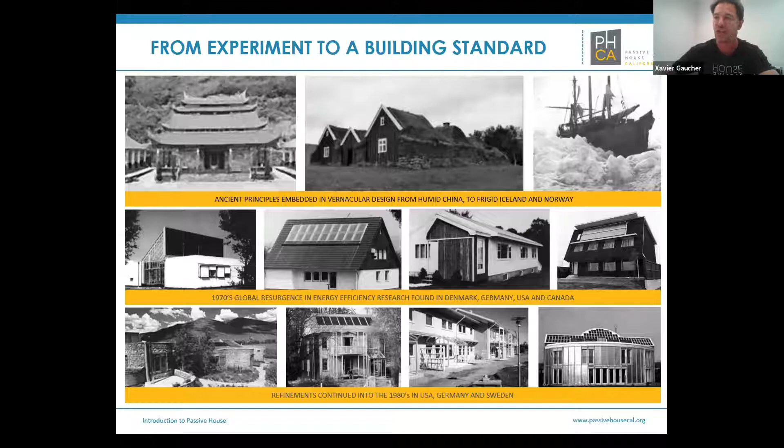And so in the late 80s, some scientists started looking at all those studies and experiments, and found that adding insulation or putting more windows towards south did not necessarily mean more comfort or less energy consumption. So they started to look at what was making buildings comfortable and energy efficient. And so in 1990, that is the first passive house which was built following those building science calculations and work.

Since then, the Passive House standard is the leading international low energy building standard, with almost 100,000 buildings all around the world. The Passive House Institute, based in Germany, is the one who started and is promoting the concept. And what's important to know is that the Passive House standard is not only for single-family houses. You have here an example of the Cornell Tech Tower in New York, a 26-story building certified in 2017. If you go to New York, when we're able to travel again, I encourage you to take a tour. It's a great building. And you have a 45-story building which just got permitted in Vancouver like a month ago. So don't only think small, think big.

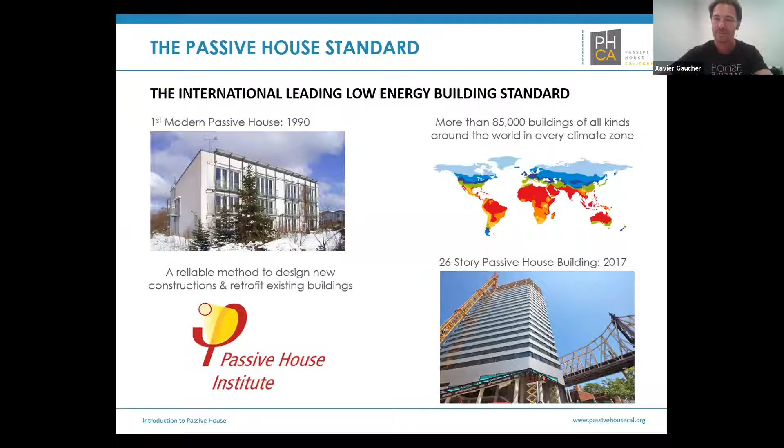One of the first results of that science research, done by Dr. Feist and Dr. Bo, the two scientists who initiated the Passive House standard, is that energy efficient buildings mean comfortable buildings. And it's as simple as a coffee cup. Either you go to Starbucks and they deliver it with an already built-in retrofit, a sleeve so you don't burn yourself, or you can use a coffee thermos and keep your coffee hot for a long time and not burn yourself.

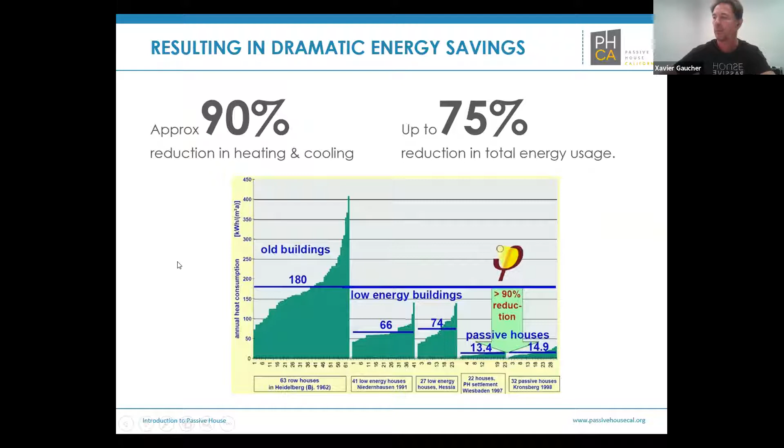Starting with the end, the Passive House standard reduces heating and cooling consumption by up to 90%, and total building energy consumption by up to 75%. This gives you some examples. The passive house standard has been around for 30 years now. In 2000, the European Community financed a study looking at 250 dwelling units across Europe. That's what boosted the passive house standard: they saw that the calculated numbers matched the operating numbers, which is always a big challenge with building standards, whether what you design matches what really happens in the real world. In that study, there was less than a 5% difference between the operating numbers and the calculated numbers.

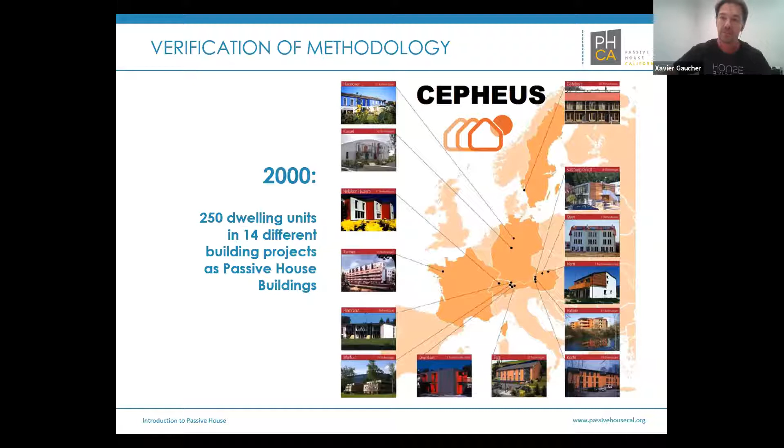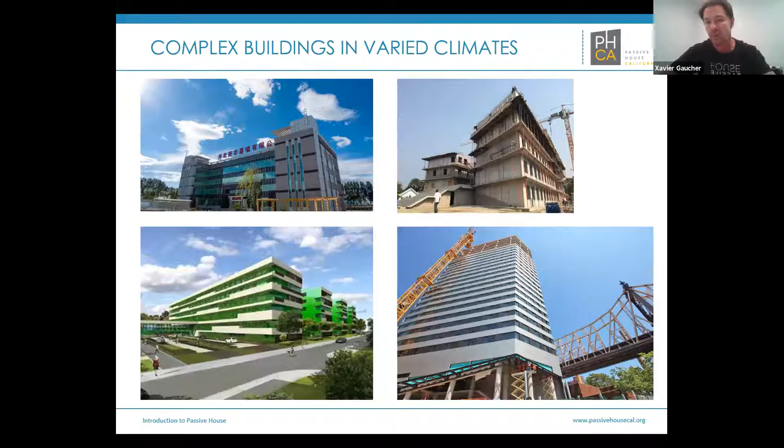And now the passive house standard is making it into a lot of building codes. And one of the reasons here is that when you look at New York's 80/50 CO2 emission reduction plan, reducing 80% of the CO2 emissions by 2050, you can see here that the building is a big part of them achieving their goal.

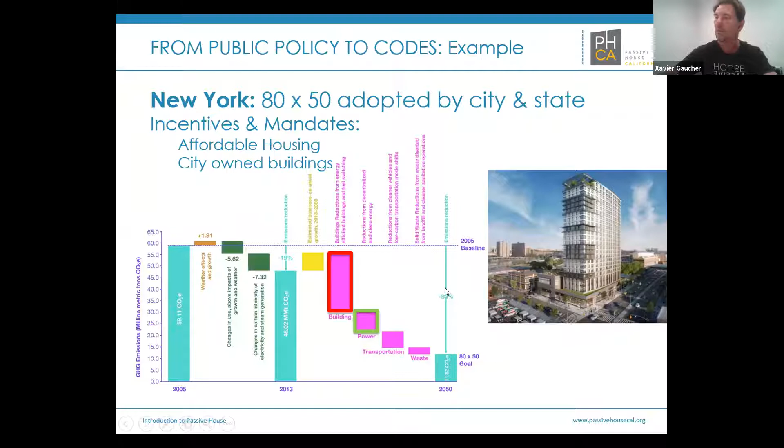Vancouver is actually doing the same thing, adopting the passive house standards as their construction standards in their climate change plan. Brussels was actually the first city in the world to adopt the passive house standards for all new construction, and Europe is moving all around in that direction as well.

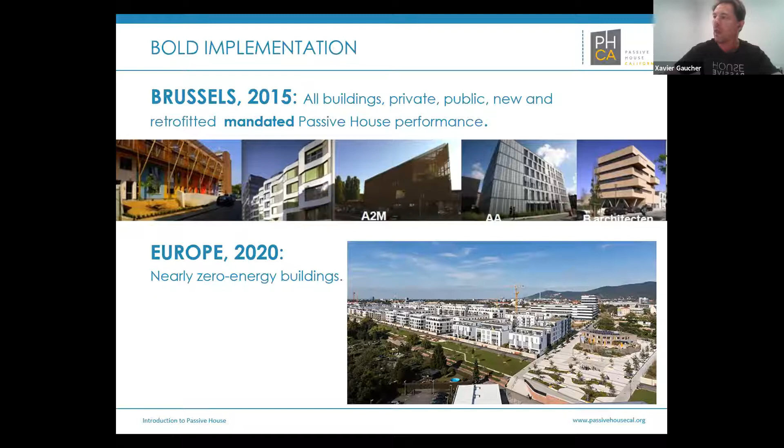And the only way to achieve that goal is to start from the beginning. The passive house standard is not a coat of green paint that you apply to an existing design. It's something that you take into consideration from the first line of the building that you design. Very briefly, it's based on focusing on the passive elements. So of course, the orientation, the massing, the thermal mass of the building, the insulation, air tightness, the windows, the doors. And it sets fixed performance goals. So those goals are fixed.

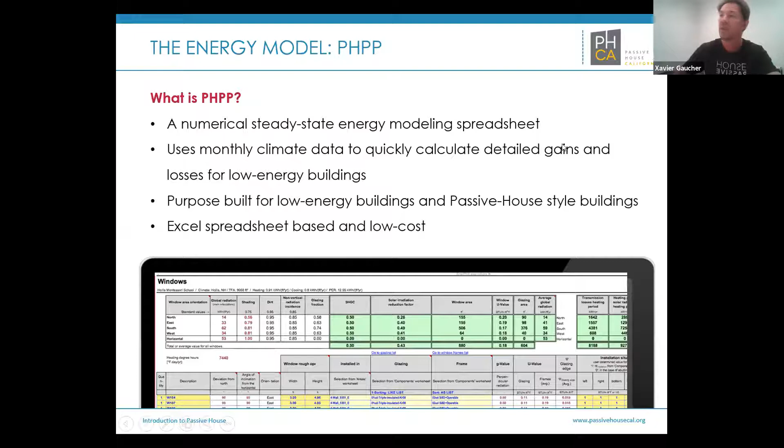The Passive House has 3 certification levels. The first one is Classic, and since 2015, you have 2 other certification levels. The first one is Plus, which is somewhat equivalent to Net Zero, except it's based on the building footprint and not necessarily on the building square feet. And you have the Premium one, which is somewhat equivalent to carbon neutral buildings.

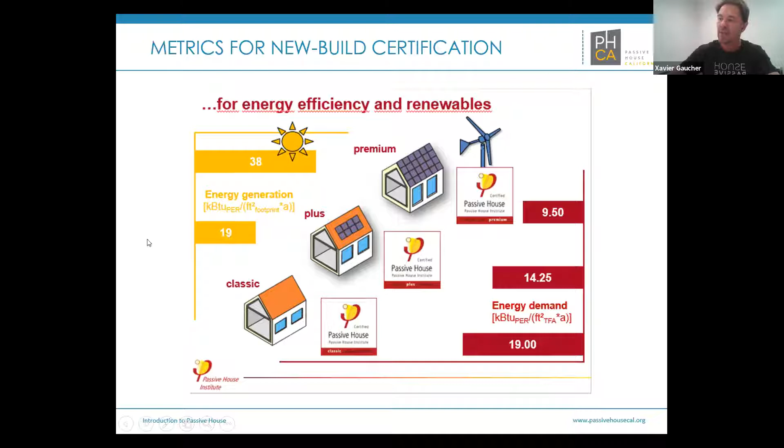And the reason that Passive House introduced those 2 is that we need to move towards renewable energy, but it's a huge challenge, as we can see now with everything happening in California with the power outages. If you look at the renewable energy we need and what's being used at the building level, a small portion, let's say 30% to be precise, is used directly for the renewable energy that you use.

But for 50% of it, you will need to go through storage, either short-term storage, which has about 80% efficiency, or long-term storage, which has a 30% efficiency. So basically, when you look at the quantity of energy that you need to supply energy all year round to a building, you basically need 2 to 3 times more energy. So that's one of the major issues, and that's why energy efficiency is a major part of the renewable energy transition.

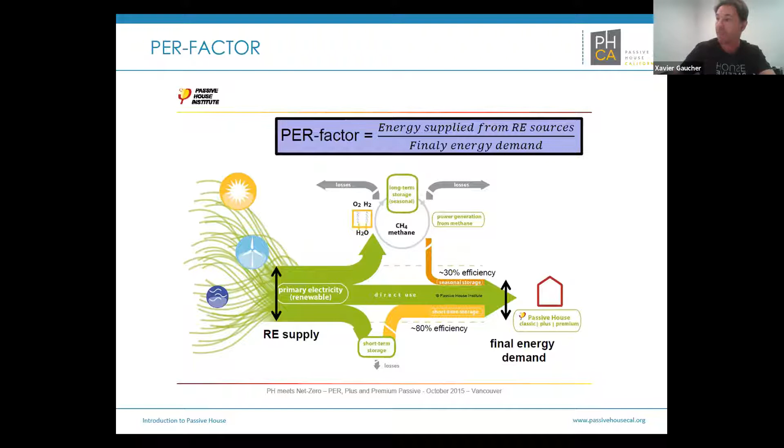As I said earlier, the Passive House standard is not only for new buildings. You have a methodology which is called EnerPHit for existing buildings, which is actually one of our major issues that we need to solve.

The Passive House is based on 5 principles. One is continuous insulation, and when I say continuous, I mean roof, walls, and floor. Two is avoiding thermal bridges, which are basically any holes in the insulation, which most building codes forget, and which can represent up to 20% of the heating and cooling loads. High efficiency windows and doors, and shading in California. Air tightness, and continuous ventilation. Those are the 5 Passive House key principles.

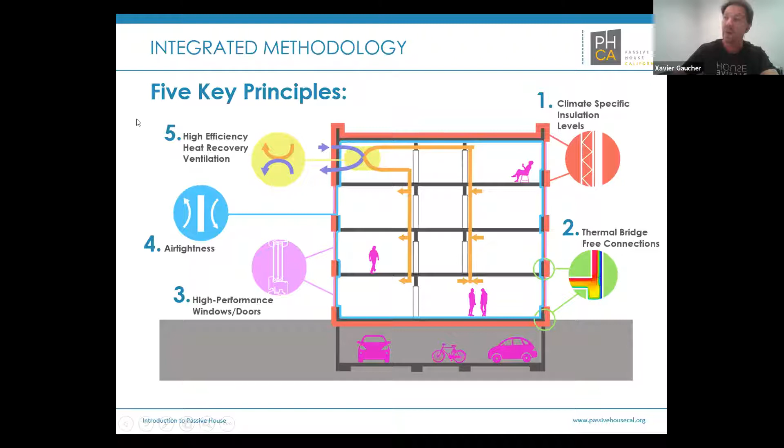Last, there is much more than that. First, what you need to understand is that the Passive House standard focuses on energy and comfort. That's the two aspects that the Passive House standard takes care of. Of course, there are so many other ones, embodied energy, water, energy type, and all that stuff.

And so LEED since January 2019 actually gives credit to Passive House standard projects. So by doing the PHPP modeling, you automatically get credit if you do Passive House buildings, because it's important that Passive House is not a certification or label like LEED can be, which takes care of much more stuff. Passive House is a tool, and Passive House is a tool which helps you to achieve better LEED buildings.

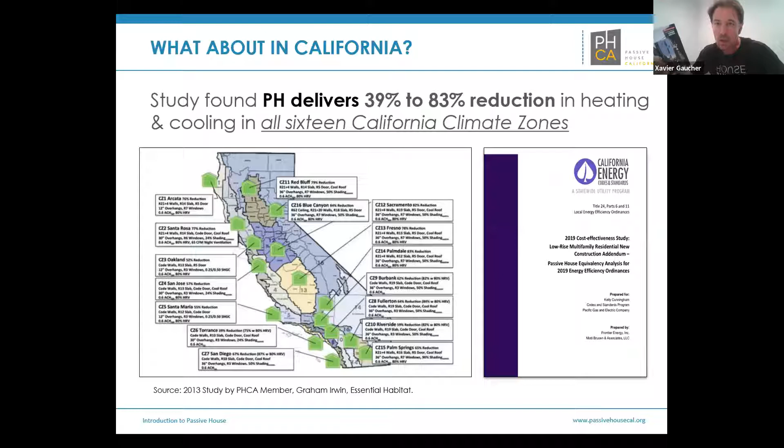Great, so I think we have time for one more question. Can you please discuss a little about how to go about renovating an existing home?

Christian, since you're on mute, I'm going to start. You can kick in after.

The EnerPHit process, which I was speaking about briefly during the presentation, is a step-by-step renovation. The goal is to look at the existing building and see how you can improve it, and to do the energy modeling of each one of the steps that you need to do, showing you what will be the final result. And you can tweak it and adjust it in order to see what it is.

The goal is to give you a roadmap for your renovation, and it may take 2, 5, 10 years. But when you do something, you know that you're doing the right things. Because today, when people change windows, they change to the windows that the best window sales guy is offering them. Is it the right window for the project? They don't know. So what's really important is to define that roadmap, and then to do the work according to that roadmap, which will guarantee you the final result.

And the nice aspect is it can be implemented over a long-term time period. So you don't need to do everything at once, because for a lot of homeowners that's a challenge. But if your roof needs to be replaced anyway, it's a good time to replace it with the end goal in mind. And then maybe over a period of 15 or 20 years, you reach the final goal of a high performance building.

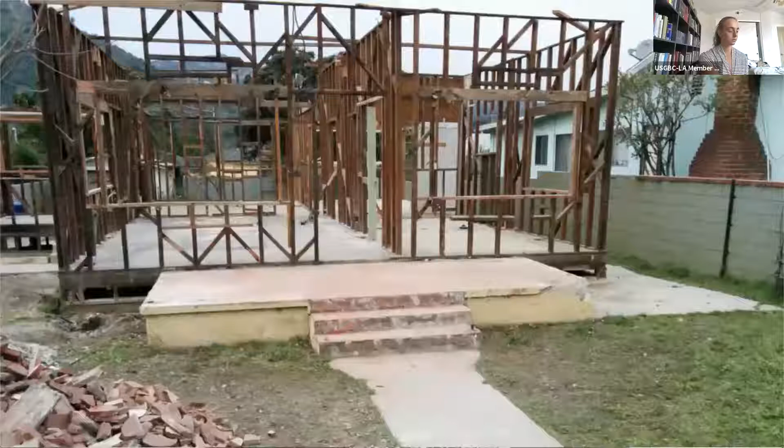So when we moved to Los Angeles in 2015, it was the only thing I had in mind. I wanted to build a passive house. And so we found this house, which, as you can tell, could benefit from some improvements. It was a 1,100 square foot, one-story house. To minimize the impact and budget, we decided to keep the existing footprint. So we kept the foundations and the outside walls and added one story.

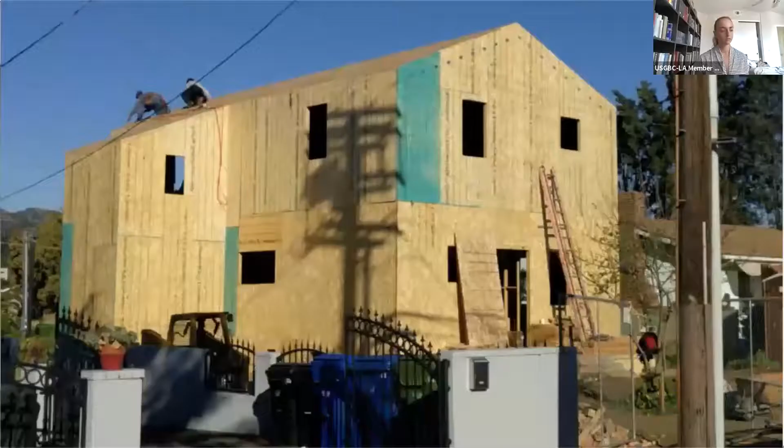So now downstairs we have an open living space with a kitchen, a dining room, a living room, an office/guest room, and a bathroom. Upstairs, we have a den, a laundry room, and 2 bedrooms with en-suite bathrooms, and it is 2,100 square feet.

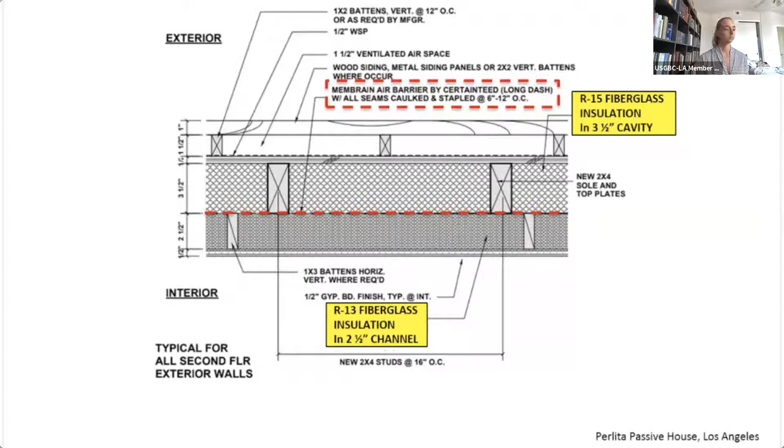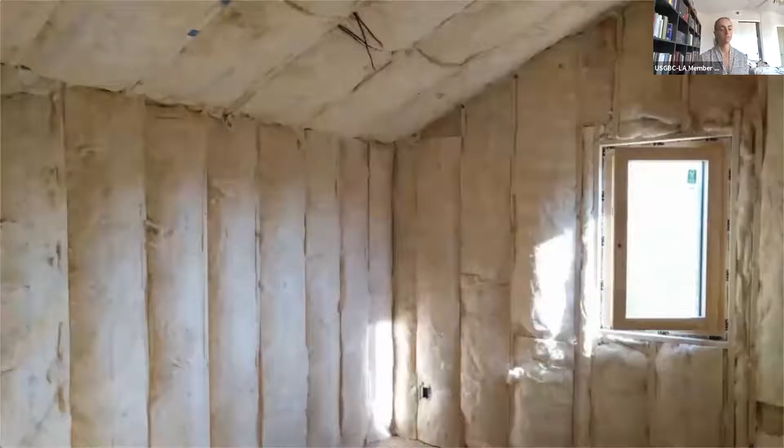Because of the very narrow driveway, we could not add external insulation, which would have been the best way to avoid thermal bridges. Therefore, we did a double wall to have the extra layer of insulation required by the passive house energy modeling. So we have a layer of R15 insulation and a layer of R13 insulation for the walls. For the floor, we have R21 insulation between the floor joists. And for the roof, we have R38 insulation between the roof rafters. And we use standard fiberglass batt insulation.

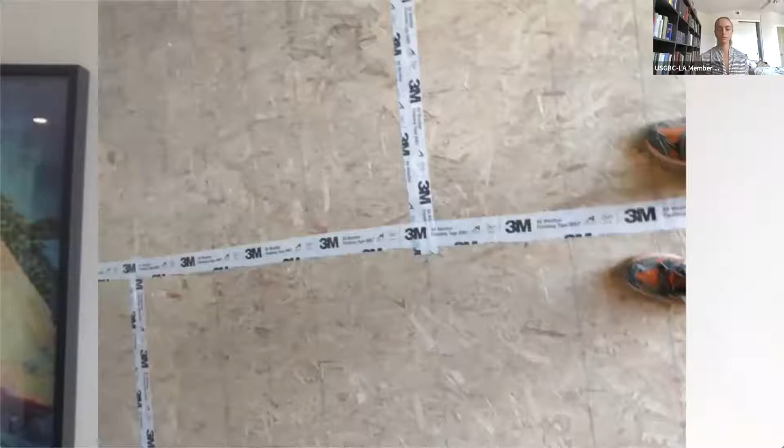Our biggest challenge was the airtightness, which is one of the important principles of the passive house standard. So for the floor, we taped the OSB sheets, and for the walls and the roof, we used an airtight membrane, which was supplied by the insulation company. This product made it really hard to meet the airtightness numbers, but we did it after a lot of work, a lot of extra work.

So my first advice is stick with products which have been used by experienced passive house crews. Don't try to experiment with unproven solutions, especially on your first passive house project. Same thing with the tape. We switched during construction from the white tape that you see on the picture to the green tape for the same reason.

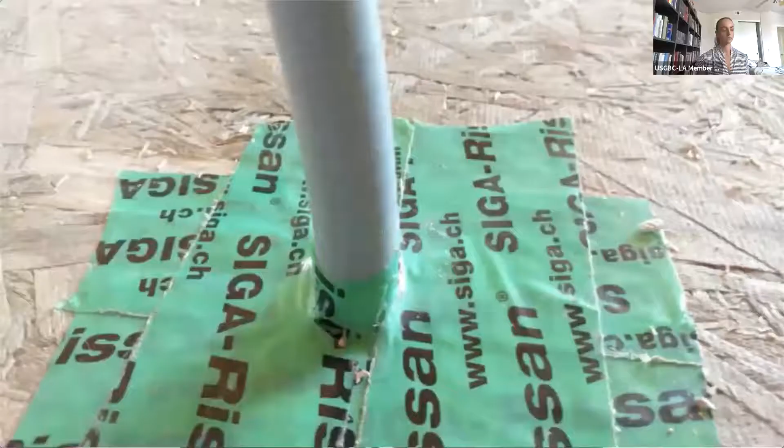Every connection, every window frame, every penetration needs to be sealed. So this is actually why we installed the electrical panel inside the building envelope to minimize the number of penetrations. So here is one of the few penetrations that we kept for the kitchen island, and that's how it's supposed to be done.

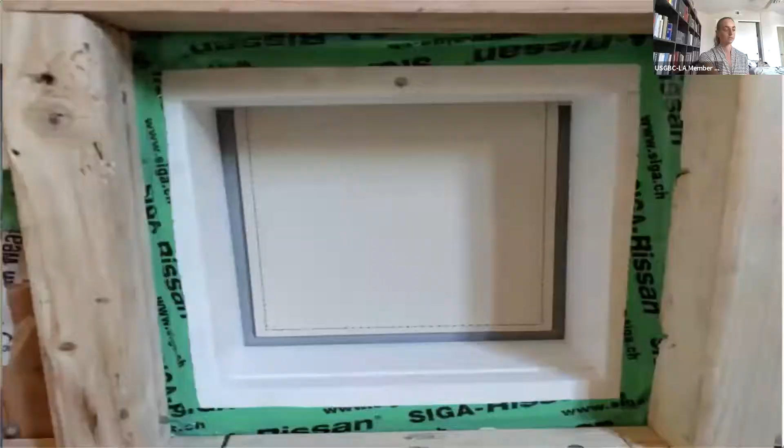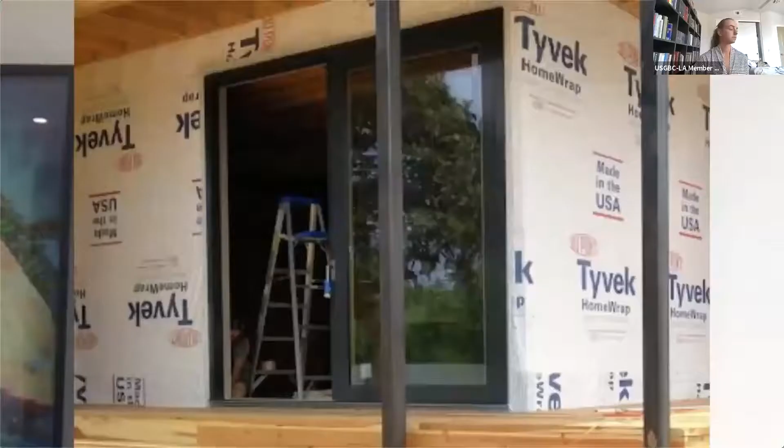Here is our airtight pet door, which we actually had an easier time to find than our airtight high efficiency double pane windows and doors. And here is our sliding glass door, which has a lift and slide system, which seals it when it is closed.

Airtightness, which is one of the biggest improvements that your construction code needs to make, is quite simple if it is designed properly with proper construction details, easy to achieve on site. So it's more a design issue than a construction issue. That's also what we learned.

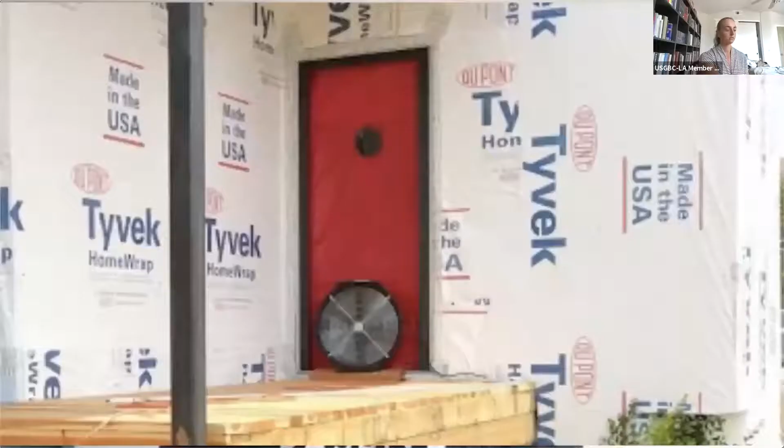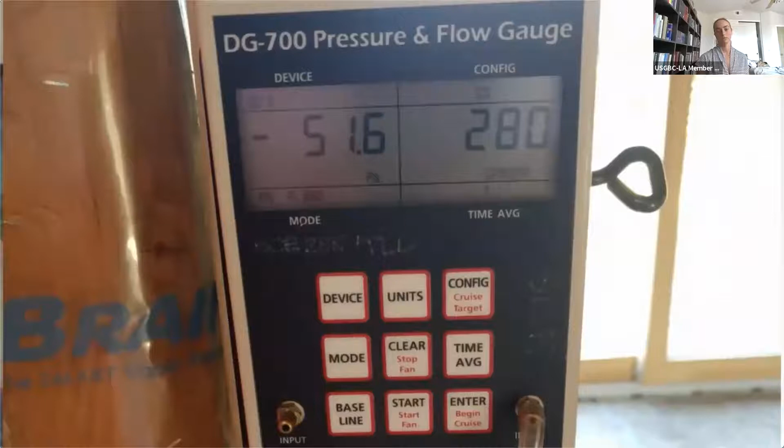You control your airtightness level using a blower door, which you can borrow for free from Southern California Edison. And so you do it first during construction when you can access your airtight layers, and then at the end for the construction certification. But at that stage, if you don't meet the numbers, it is too late because you cannot fix the problems.

Constant ventilation is also one of the passive house principles, because it is the only solution to ensure proper indoor air quality. So on our end, unlike in most passive houses, because we are in a mild climate, we were able not to use a heat recovery ventilation system.

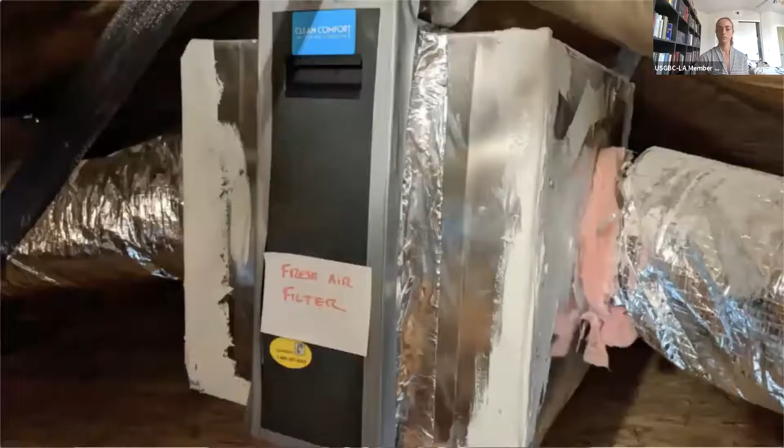So what we have is a MERV 13 filter and the fan running 24/7, supplying fresh air in the return plenum of the HVAC unit. And we have a second fan extracting air 24/7 as well from the kitchen, the bathroom, and the laundry room, keeping a balanced ventilation system.

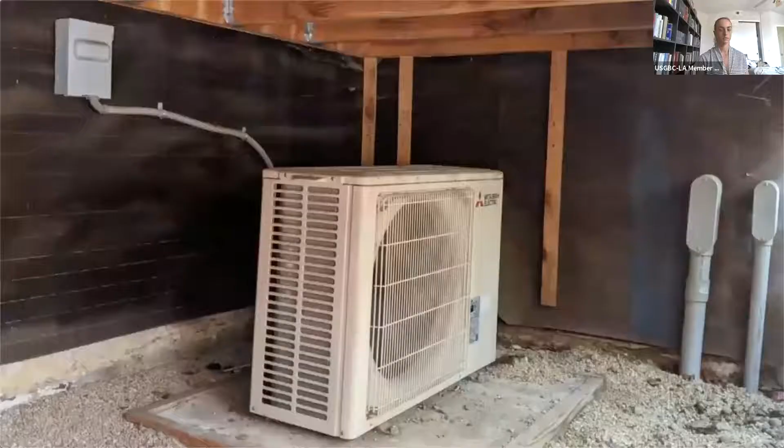The entire house is all electric. So here you can see the condensing unit for our heat pump system, which is installed under the back patio. And this is the heat pump water heater, which is installed in the basement, which was already existing in the previous house. That's our heat pump dryer, which only requires a 220 plug and no venting.

And this is our induction cooktop. We cook a lot, and we have been using induction for over 15 years, and we won't switch back to anything else. And it works well with all my wife's grandmother's cast iron pans.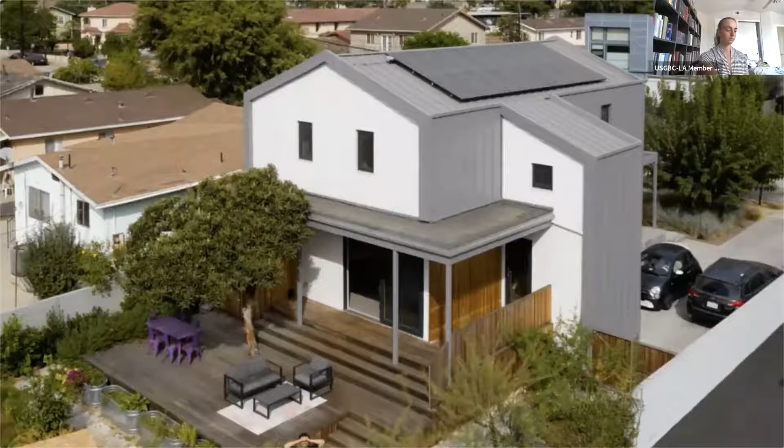We have 16 solar panels. The house is able to reach net zero with 12 panels. And so the 4 extra panels supply the power for the electric car that we use for all our local commute.

We also have a 13.5 kilowatt-hour storage battery, which allows us to be off-grid 2/3 of the time, which is actually great during power outages. But it also made me realize how challenging the all renewable energy transition we need to make is, and how energy efficiency is a key aspect of it.

I would like to end the tour with this graph, which I presented last year at the Net Zero Conference. It represents the EUI, so the energy use intensity, which is the energy required from a building per square foot to operate, according to different building standards for the whole house, and the number of solar panels which will be required to meet net zero.

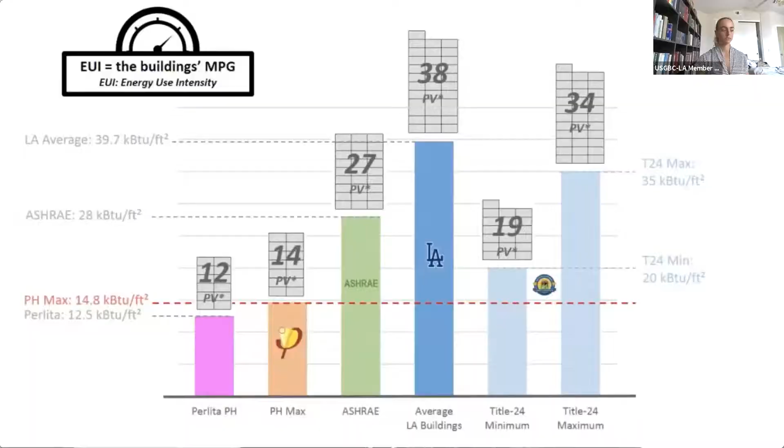And what you can see is that today, a code construction can require about 2 times more solar panels than a passive house construction, which actually would pay for a big part of the $22,000 extra that a passive house construction required.

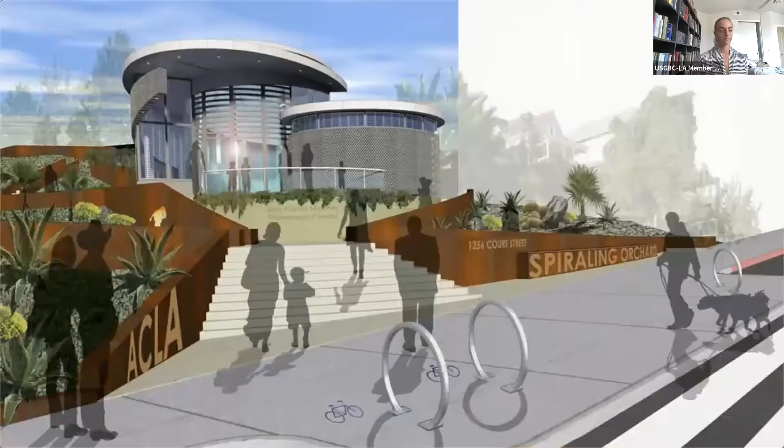Welcome to Passive House, Los Angeles. I grew up in Berlin and studied architecture in Germany, where I was early on exposed to the Passive House construction standard. In 2010, with Parallel Architects, we had our first Passive House approved in Los Angeles. It's a small community center, which unfortunately became a victim of the great financial recession. Since that time, I have always tried to educate clients about the advantages and the comfort of building to Passive House standard. But none of my clients wanted to be a guinea pig and the first one here in LA to build a Passive House.

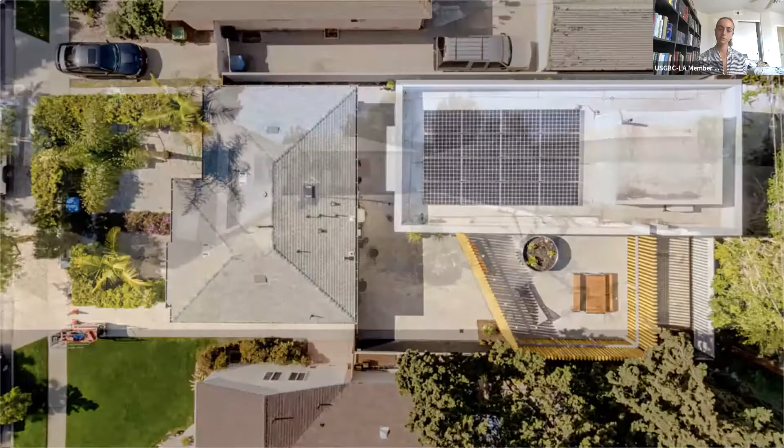When my wife and I were looking to purchase a property, for us it was always clear that we wanted to share the property and, of course, the mortgage. In 2013, we bought a 6,000 square feet property with a small 1,000 square feet typical building in the front portion of the lot. When it was time to plan for the new second house in the rear of the property, it was clear it had to be built to Passive House standard.

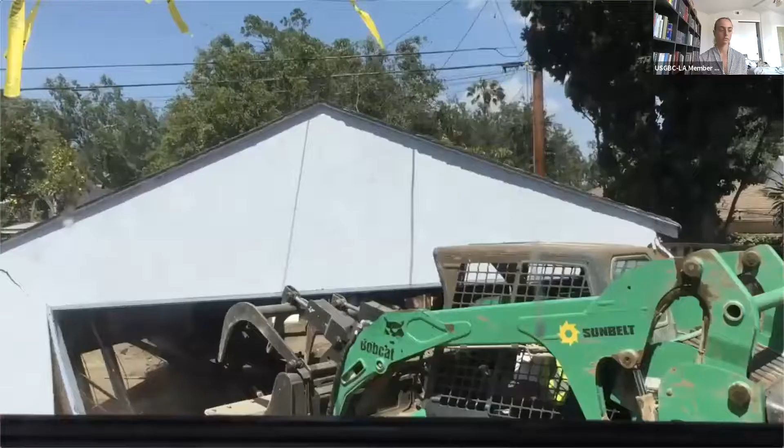This time I had to convince only my wife, and the argument of comfort and low utility bills did the trick very quickly. At the same time, it was important for me to create a showcase or a case study that I can bring potential clients into to test drive, and show them how well a Passive House building is performing.

Since the opening and during construction, we had already hundreds of people in the building. Passive House LA is 1,750 square feet large. It has 4 bedrooms and 3 baths. We have to say that the bedroom on the first floor is currently used as a home office, and the bathroom on the first floor is fully wheelchair accessible should that be needed at any time in the future.

On the first floor, we have the kitchen, open dining room, and large living room with large windows covered by exterior shades which are fully automated in order to block the sun and keep the Southern California heat outside the building. On the second floor, you see the outdoor deck, which is at the same time the cover for the required carport. We have a gallery for the large book collection, and then the master suite with the master bathroom attached.

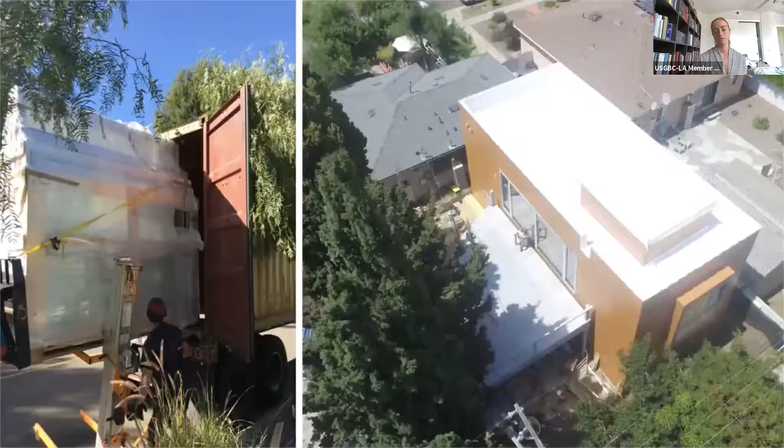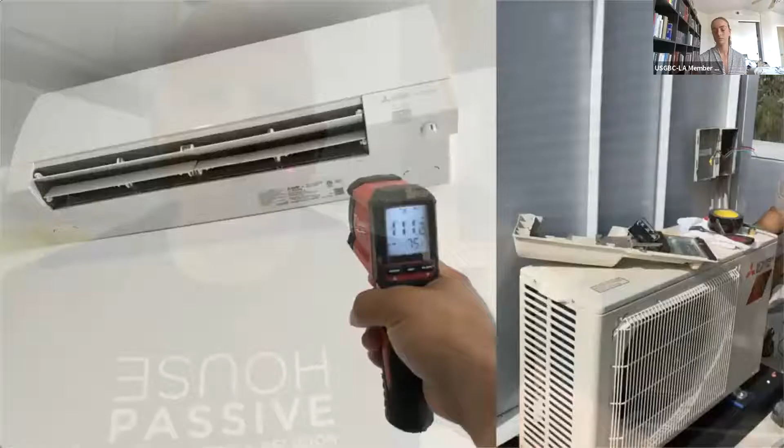In terms of building systems, we're using a heat pump water heater with recirculation pump. Each bathroom has a motion sensor installed, and that triggers the recirculation pump, and this way we have immediately hot water at the tap. For the heating and cooling in the building, we are using one mini split system for the entire house.

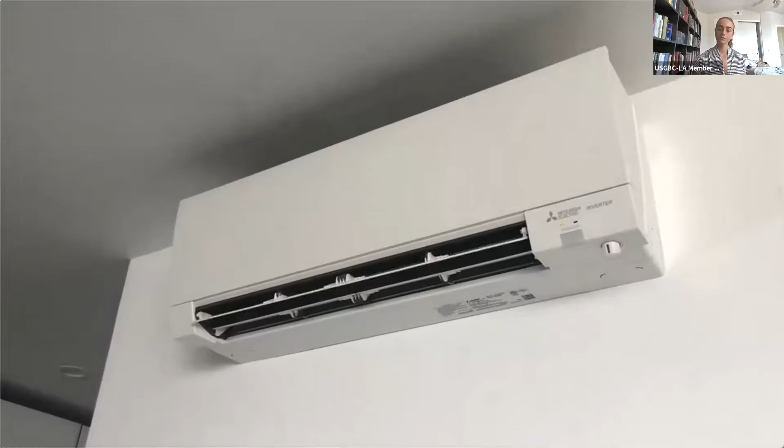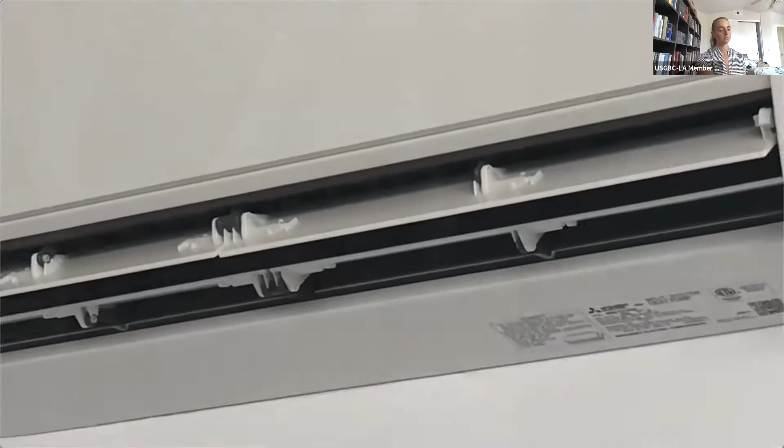The house is 1,750 square feet, and we actually had an open house, which was quite interesting, and we had the representative from the air conditioning company out here asking, how do I like the system? I had to tell him, I don't really know. I rarely use it because it's most of the time not needed, and the ventilation system, the heat recovery ventilation, does pretty well here in order to provide sufficient airflow and comfort in the building. For the continuous ventilation, we have a ComfoAir 550 in the building with a MERV 13 filter.

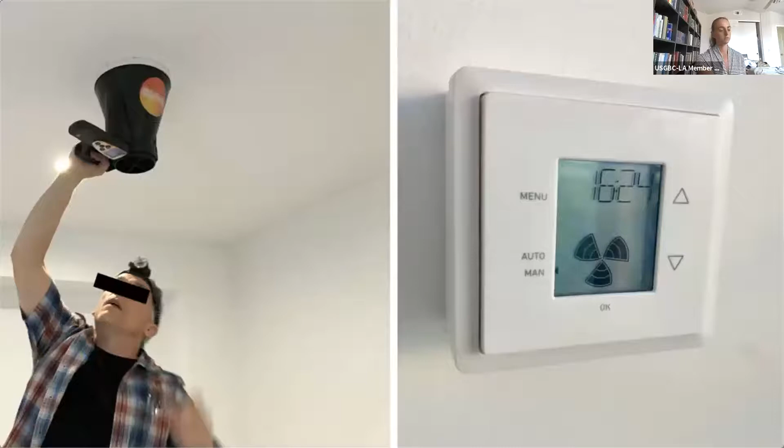During the construction and also in the end at the final blower door test, those are always nerve-wracking moments in the process of a passive house. Turned out we came in at 0.48.

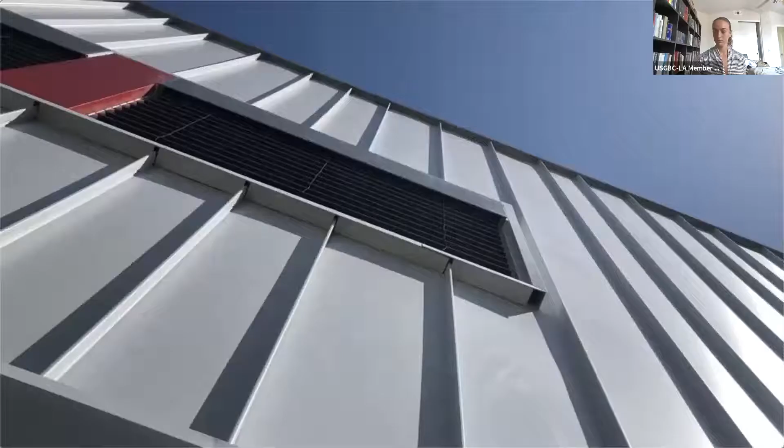For us, it was very important to have a lot of daylight in the building, especially in Southern California. It is critical that you have large windows if you want to have a building which is succeeding in the local market here. That meant large windows, lots of daylight into the building, so we needed to come up with an exterior shading strategy. Most people do not have exterior shading here, which is very surprising to me, because if the heat is in the building, it's too late, and we typically solved it with bigger air conditioning in the past.

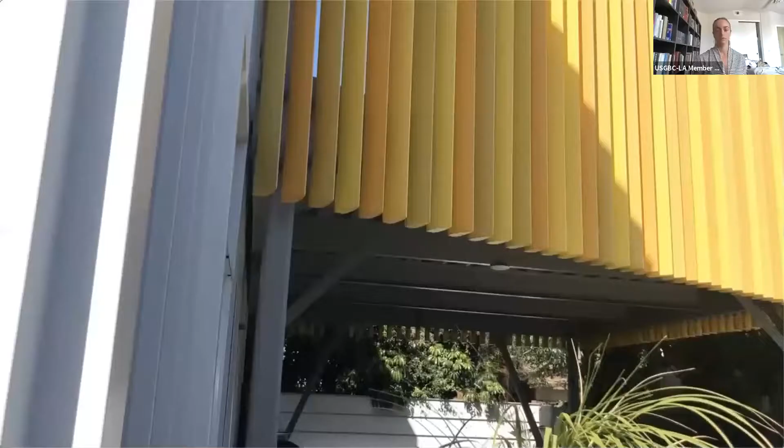But shading belongs on the outside, and we chose an automated Venetian blind shading system, which fully operates automatically. We have a roof sensor which tracks the sun and is adjusting the blinds as needed. The great part about that one is we are still getting daylight into the building, and at the same time, we still can look outside the building. You will see also in the videos, we don't have any interior curtains. We're using the exterior blinds also as our privacy screen, which works very well.

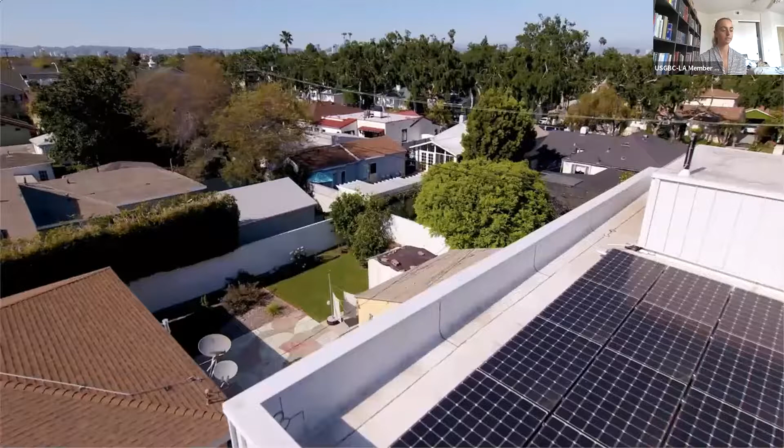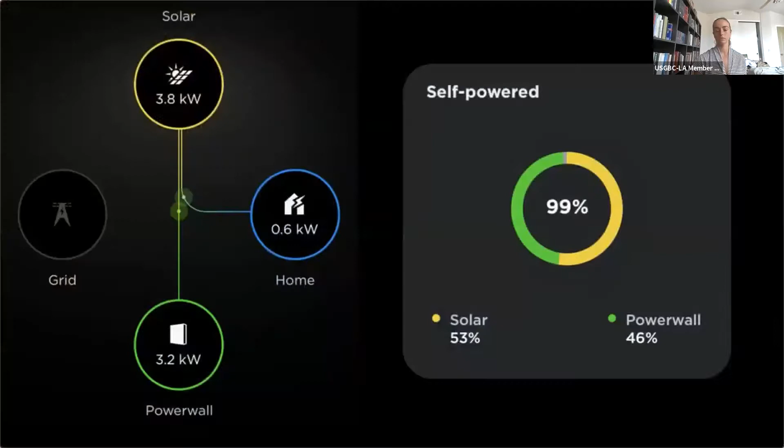In terms of on-site renewable energy production, we have 16 solar panels on the flat roof. We are net zero with only 10 solar panels, and we also have a battery backup system. So the solar panels are feeding the battery backup system, and the disconnect is located behind the battery. So even during a power outage, the solar panels keep feeding the battery, and the house can draw the generated power via a critical load panel. So we have independence should there be a power outage for a longer time.